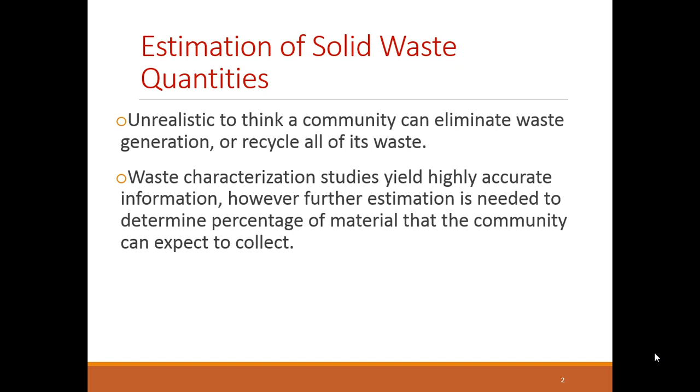So some of the factors which need to be considered in the estimation of quantities are as follows. 1, does the community have a public or private collection system? So public would be the ones, for example, carried out by our municipal corporations or regional corporations. That would be public. Private would be those collection systems owned by private companies who would be contracted by different organizations. Sometimes they may even be contracted by government agencies. So the figures would tend to be more readily available from a public collection system.

So the second point then is, does the community have businesses or industries which use private collection? So here is where the challenge is. Where private collection occurs, we may have a challenge accessing the waste generation information that we're looking for. So between points 1 and 2, that's really the issue here. If you're using public collection systems, data may be more readily available. If it's private collection, data may not be as easily available.

Okay. Third point, are there large numbers of residents in your community who recycle their own waste? So where we have recycling of waste from residents, you find that there's a reduction in the waste generation that you would estimate, because the waste generation rates would be estimated from what is collected. So if you have recycling or reuse going on in your home, you tend to reduce the rate at which you're producing waste. So you can expect a direct influence on your waste generation rates. Unfortunately, even that information as to what is going on within the home in terms of recycling and reuse activities would not be available either.

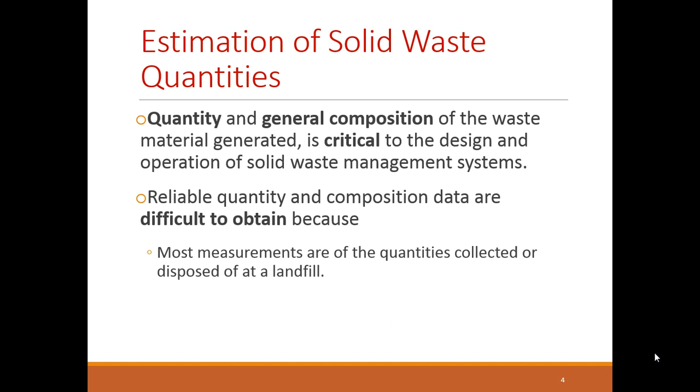And reliable quantity and composition data, this is often difficult to obtain. And why? Because most measurements are of the quantities collected or disposed of. We tend to get this from the landfill, and when this is deposited at the landfill, even that becomes a difficult job as well, because you have the commingling of all different types of waste together. So now you have the job of trying to separate them to estimate different components and quantities, etc.

We're going to look briefly at just two waste volume estimation methods. The first one is identified as load count analysis. And what does this type of method record? It records, first of all, the number of individual loads, such as the trucks that would come into, let's say, the landfill, the numbers of trucks.

Then you would look at the volume of waste being deposited with each load. And as mentioned before, that's easy for you to figure out, because you would have the information as to what the weight of the truck would be when it's empty. Then if you weigh it, you would be able to determine what volume or weight that is that you have deposited. Then you would also look at the composition of each load.

And remember, as I said, the composition would be the different types of waste components that would be associated with that particular load. So this is one of the ways in which you can estimate your waste generation rates using this kind of information. And of course, this would be recorded over time.

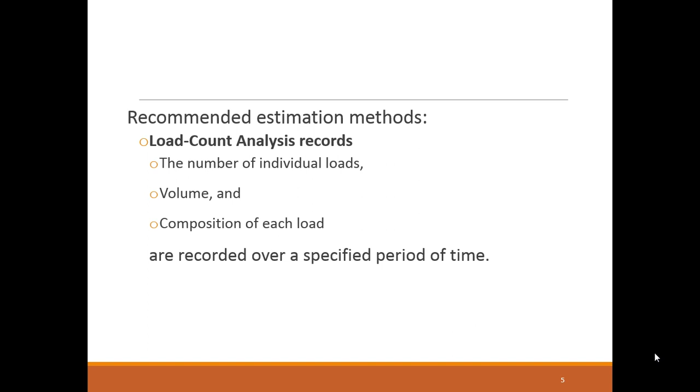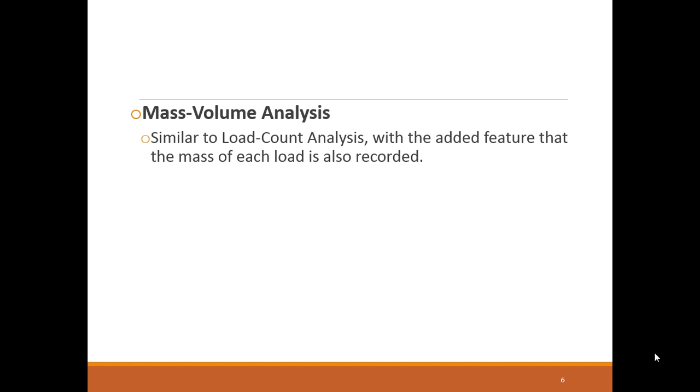The second method, the mass volume analysis, is similar to the previous one that we just looked at, the load count analysis. However, there's the added feature that the actual weight of the load is recorded. If you recall, previously we were looking at number of loads, volume of load, and composition under load count analysis. Here we're looking at all of those, but we're also including the weight of it. Alright, so those are two examples of how we can calculate quantities data for our information.

Right, so we're looking at estimating future waste generation. The two most important trends to investigate when we are looking at data in order to project into the future are population and public policy changes, because these are things that influence the way people behave. So we would look firstly at population growth rates. When we have population growth rate, it means that we can project what that population would be in 20-25 years.

With that kind of information, you will have some idea. If you already have current waste generation rates, you can determine, okay, in 25 years I need to have the capacity to manage X amount of waste, so I have to have the facilities in place. That kind of information would also influence the types of policies and programs that your governments would put in place as well. They may see the need for increasing the implementation of recycling and reuse programs, or for the implementation of incineration facilities, etc.

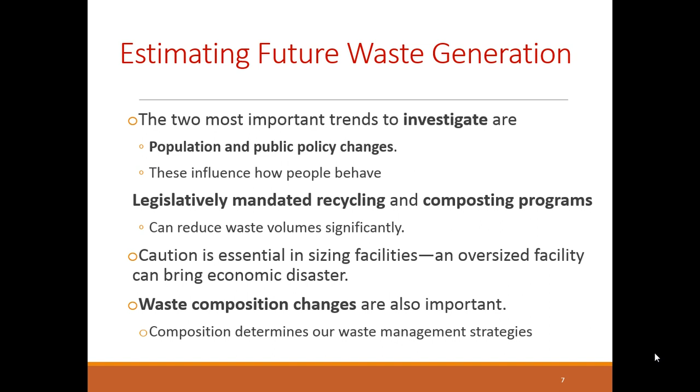So let's look briefly now at on-site handling of waste. So on-site handling would be the source of the generation, for example, your household. So handling and separation of waste, this is a critical step in the management of residential solid waste. What systems do we have in place?

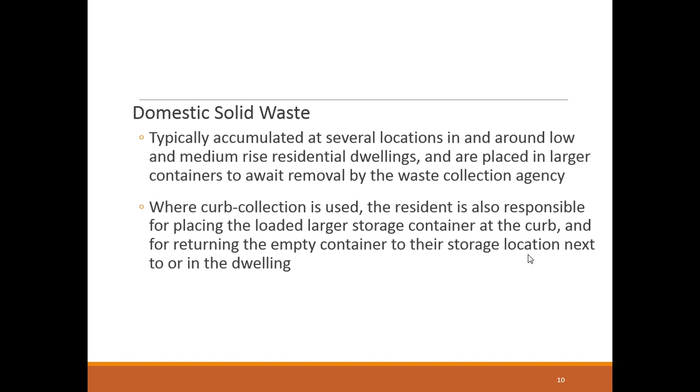Here is an example of some of the different types of containers that may be used for storage before collection. So many of you might be familiar with the dumpster scenario. These would be used in multi-residential buildings. Sometimes you will even find them strategically placed in communities where the garbage truck may not necessarily be able to access every individual house in the community. So there would be community dumpsters.

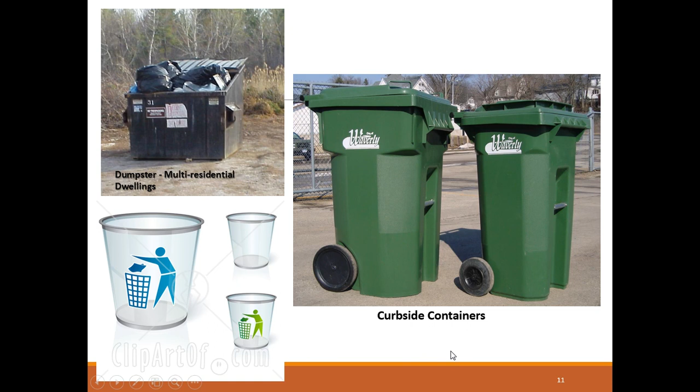Also, these are examples of containers that can be put out onto the outside of your house on the street corner there for collection by garbage trucks. So normally, as you can see the wheels on them, they can be put out and then returned to your house to be filled again. Alright, and then of course these are just examples of different types of bins that you can use throughout your house or your office, etc.

Then we have commercial and industrial solid waste handling. How do we handle that? So in most office, commercial and industrial buildings, solid waste are collected in relatively large containers mounted on rollers. So oftentimes you find there would be like a basement storage where the waste would be put, and since they're on wheels, they can now transport that. It's now mobile.

So once the containers are filled, they would be removed by means of a service elevator if you need to change levels, or it would be taken outside and emptied into a larger storage container. Some of those larger storage containers may be designed with compactors. So the compactors would be that piece of equipment that will crush the waste and compact it into less volume. So the stationary compactors will compress the material into bales, thereby reducing the volume and making it easier to store.

And then of course sometimes, as other options in these kinds of settings, there may also be on-site incinerators where the waste can be burnt and disposed of easily. Okay, if there is no incinerator, the compacted waste would be collected by a collection agency to be disposed of as well.

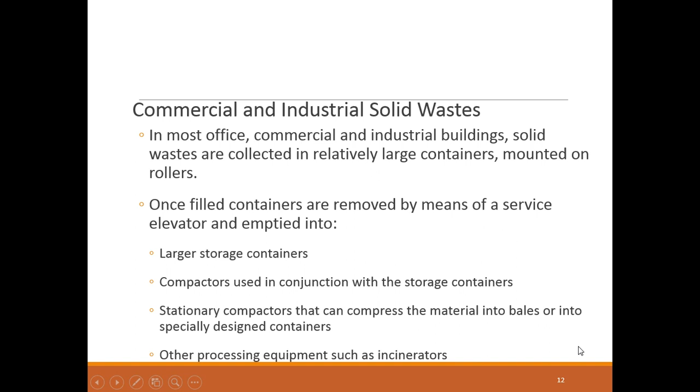Okay, we're going to discuss briefly on-site storage of solid waste. So what are some of the factors that would influence the type of storage containers that we would choose? We're going to look briefly at each of these: the effects of storage on the waste components on your choice, the type of container, the location, where do we put it, and we're also going to be looking at public health and aesthetic concerns.

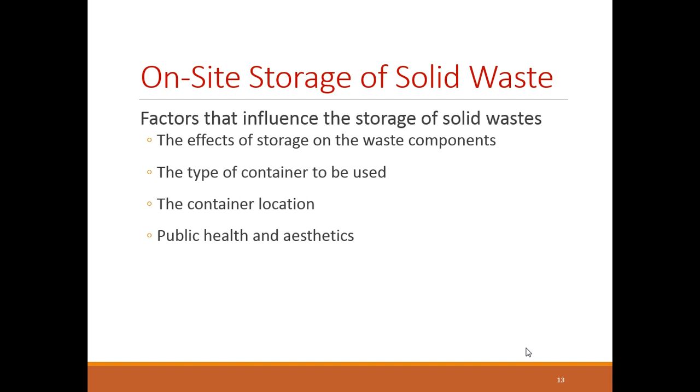So let's look at the effects of storage on waste components. So the first point we want to look at is microbiological decomposition. So where we have food and other organic waste we place in on-site storage containers, we need to be reminded this type of waste would almost immediately start to decompose. And when it decomposes, it results in the growth of bacteria and fungi.

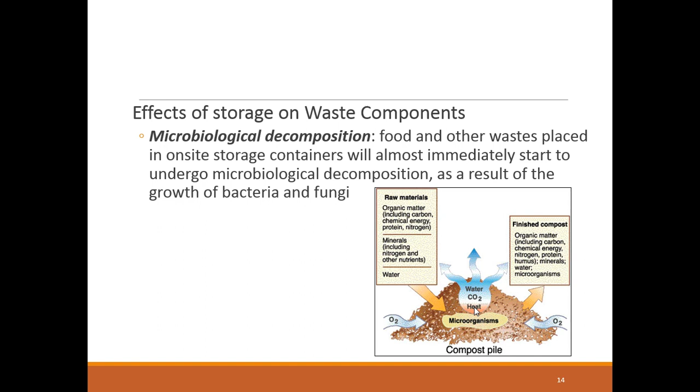So for example, if you choose to put that in a metal storage, there are going to be leaks, it's going to be rusting, all kinds of things going to happen, and that would not be very sanitary.

Then we also have concerns with regards to absorption of fluids. So because the components that comprise solid waste have different initial moisture contents, re-equilibration takes place as the waste are stored on site in the container. What do we mean by this? Where you have different types of waste mixing together. For example, you will have paper absorbing the moisture from food waste and garden trimmings. So now you have a mixing, a commingling of your waste as a result of absorption of fluids.

Other concerns would be contamination of waste components. So this has a serious effect on the on-site storage process, where you have major waste components that may be contaminated by small amounts of waste such as motor oils, chemicals from household cleaners, paints, etc. This now makes any potential for recycling very difficult, because recycling will require the separation of waste. So if you have your waste now contaminated by these chemicals, or even from the absorption of fluids, as we mentioned, it reduces your opportunity for recycling of waste.

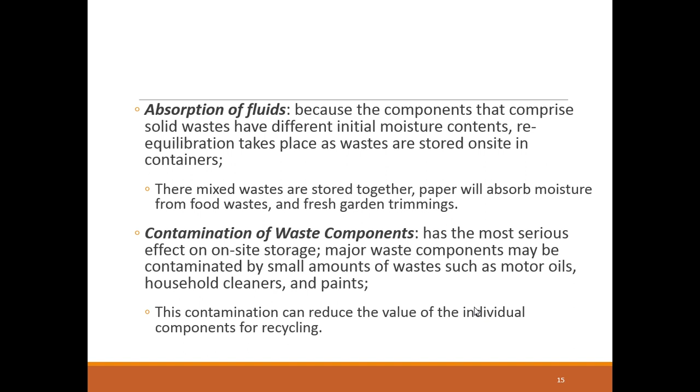Alright, types of containers. So the type and capacity of the containers used will depend on the following: the characteristics and the type of the waste to be collected, as I mentioned before. If you know it's waste that is going to be decomposing and producing all kinds of substances, you need to choose an appropriate container. You would also look at the type of the collection system in use. For example, is it a manual system or a mechanical system?

So a manual system will be a system where the truck comes by to collect your garbage, and you have the helpers, the guys who would be on the truck. They will come down, take the container and manually empty it into the truck, right?

Then you also have the mechanical system, where the truck would actually come by and it will have these mechanical arms that will connect to the storage container that you have, and those mechanical arms would lift and empty into the truck and then replace the container. So that means then that your containers must be designed in such a way that they can facilitate that mechanical process.

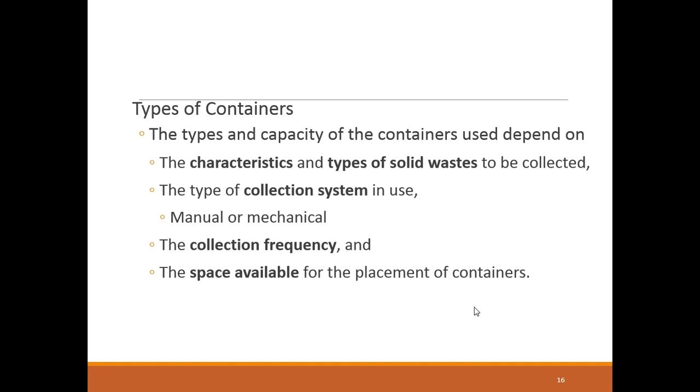Right, so getting back to the location of the container. So this depends on the type of dwelling or commercial or industrial facility. Do you have available space? And that particular space that you're looking at, is it accessible to the collection vehicle? So for example, in residential dwellings, between collections, your containers used in low rise, so that would be like single detached buildings, homes,

some of the options you have for placement would be at the sides of the house. So this is just storage location where your garbage would be stored before you put it out on the curbside. So it could be the side or the rear of your house. In places where you have alleyways, it could be stored there. It could be in or next to your garage or carport, and where some common location is specifically designated for that purpose. So for example, as I said, for some communities, dumpsters would have to be strategically placed, so that's what we're referring to.

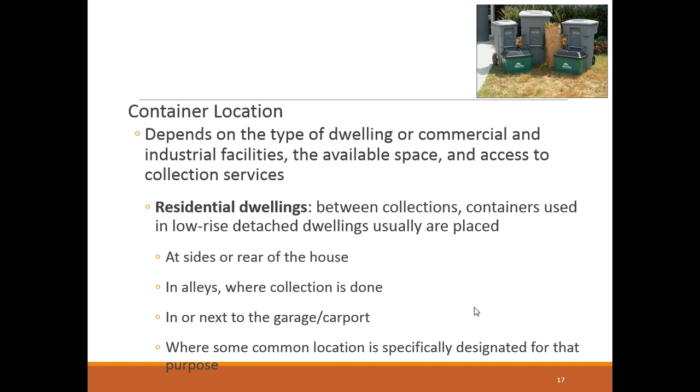For commercial and industrial facilities, placement depends on the location of the space available, as mentioned, and the service access conditions. So in other words, the collection trucks need to be able to have access to where the storage bins are. So these things have to be carefully thought out.

Alright, it's not only a matter of do I have space to place my bins or my storage containers, but if the collection trucks need to come get the container because it's so large that you are not able to put it out, because for commercial and industrial facilities the containers would be large. So it means then that it's necessary that it is in a place where the collection trucks can access them.

Then also related to container types, we have our public health consideration. So residential solid wastes have a significant public health and aesthetic impact, right? The public health concerns are primarily associated with the infestation of areas used for storage of solid waste, and that's where they would attract vermin, pests, insects, etc. And the proliferation of these types of organisms can lead to disease.

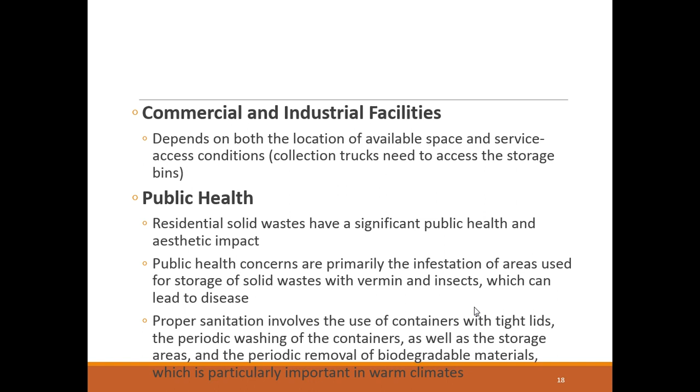So then you also have issues of odors associated with that. So odors would normally be controlled through the use of tight lids. Again, here we're talking about tight lids and the maintenance of a reasonable collection frequency. So you don't want to have a piling up of garbage, as sometimes even here in Trinidad you find that might happen at certain times of the year, if it's a long weekend, etc. Alright, and if odors persist, the content of the container, you could spray it, so you can have masking deodorant to mask the unpleasant odor, at least as a temporary measure.

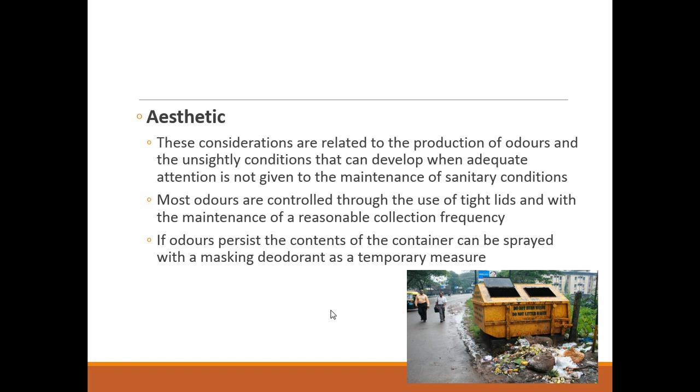So this brings us to the end of today's lesson. I would like to ask you now to please proceed to the activity for this week. Thank you.